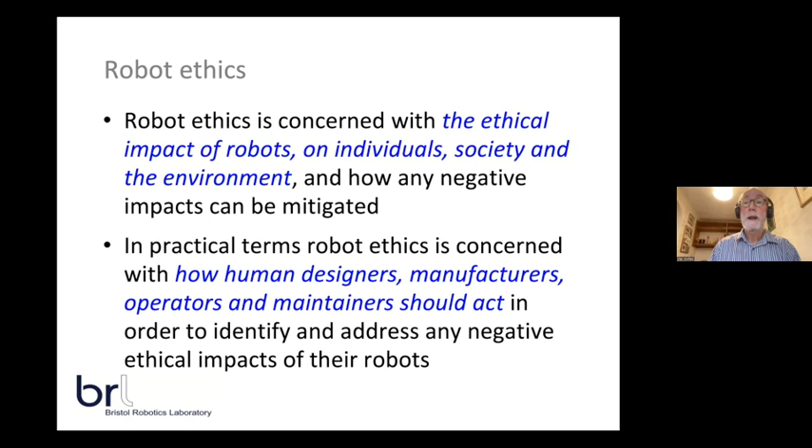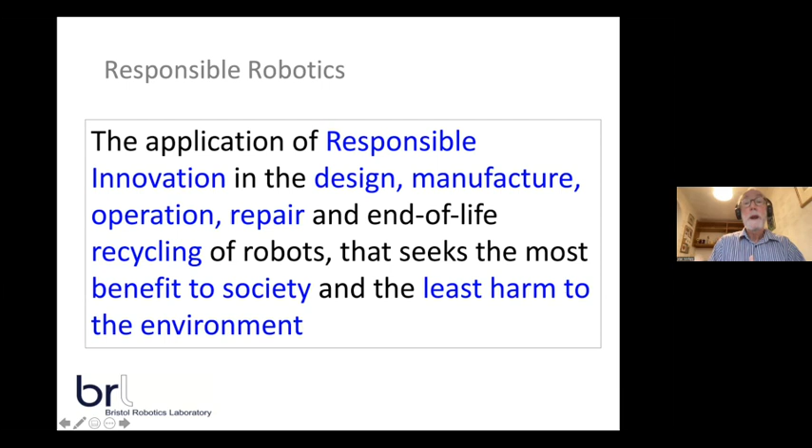Now, responsible innovation is an existing set of ideas, and I'm sure you're all familiar with responsible innovation in your research. It's something that is not an option. Anyone nationally and internationally who receives research funding will have to sign up to doing responsible innovation. So I'm sure you're already familiar with frameworks for responsible innovation.

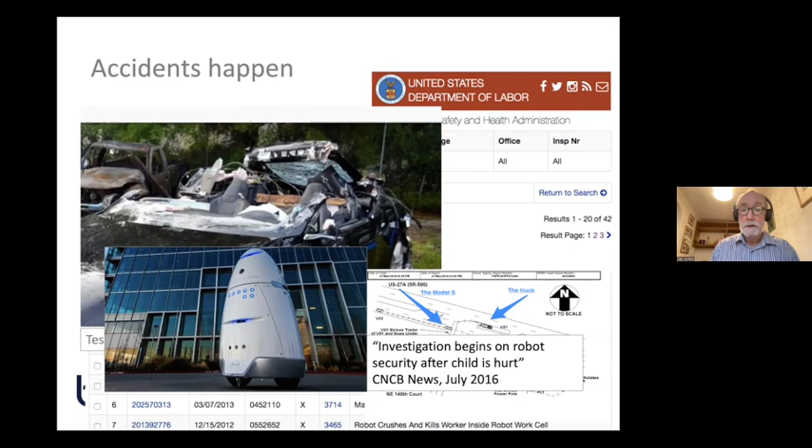So how can robots cause harm? Well, obviously the traditional first category is physical harm, but we need to add a set of ethical harms to physical harm. And those harms can broadly be characterized as psychological harms, which is a very long list of actual hazards: robot deception, over-dependency, over-trusting. Arguably, over-trusting is precisely the thing that the driver of that Tesla was doing, over-trusting the robot, the AI.

Of course, there are societal harms that we're familiar with: loss of privacy, loss of jobs, and such like. And of course, importantly, environmental harms, high energy costs, unrepairable or unrecyclable technology.

And in fact, there is a really nice crowdsourced database, which if you haven't come across, I do recommend. It's called the AI Incidents Database. And it importantly includes not just accidents, but also incidents. In other words, near-miss accidents. And of course, near misses are just as important in terms of safety and ethical safety as actual accidents, because we can learn a lot from near misses.

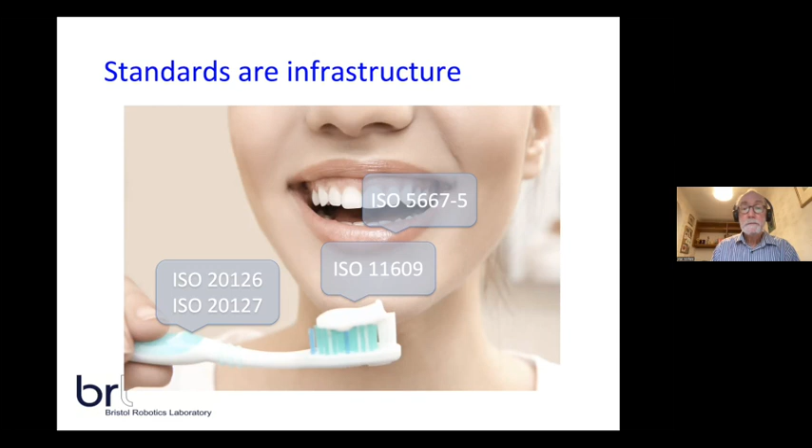And in particular, I'll start with the IEEE Standards Association, who in 2016 launched its global initiative on the ethics of autonomous and intelligent systems. And in particular, they're looking to intelligent and autonomous systems advancing for the benefit of humanity. So this is a really ethically rooted initiative.

And since the initiative was launched, we published this crowdsourced document called Ethically Aligned Design, which I recommend you download and have a look at. It's essentially a set of ethical issues and recommendations, quite a lot of them, in fact. I think around 150 ethical issues. So it really is a very broad and comprehensive approach to what we call ethically aligned design.

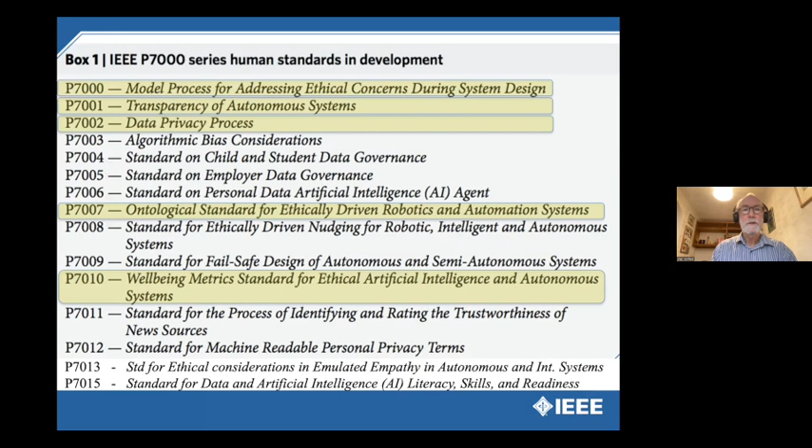And I just want to focus a little bit on the standard that I led, which is IEEE 7001-2021, which is a standard on transparency of autonomous systems. We believe it's the world's first technical standard on transparency. And again, I really want to pay tribute to the working group which I led to really bring this to publication; 5 years of hard labor was quite something.

So why is transparency important? Well, as I've already illustrated at the beginning of the talk, autonomous systems, robots can and do go wrong. And when they do, it's very important that we find out why. And without transparency, finding out why, and therefore making sure it can't happen again, is extremely difficult.

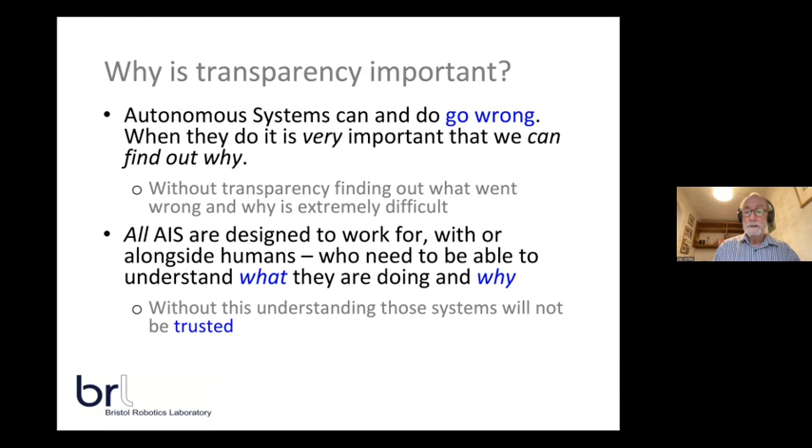And of course, all autonomous systems, all robots are designed to work with, for, or alongside humans. And of course, we need to be able to understand what they are doing and why. And without that understanding, we really will not have confidence in those robots. So transparency, I think, is essential for these things. Now, transparency is not one thing.

And in fact, in 7001, we actually organized the standard into 5 sections, where each section is targeted at a different stakeholder, because each of these stakeholders needs a different set of measures for transparency. Transparency is not the same for safety certification engineers, or for accident investigators, or for lawyers or expert witnesses, or indeed for users and wider society. So each one of these stakeholder groups has a different set of measurable, testable levels of transparency.

And I'm not going to go into these in very much detail, but I will just mention accident investigators. Well, what information does an accident investigator need to find out why an accident happened? Well, obviously details of the events leading up to the accident, and of course details of the internal decision-making processes in the robot's AI, the autonomous system's decision-making processes.

And of course, we have a very good model of best practice, which is the processes of air accident investigation. And in particular, part of that good practice is the flight data recorder, which is fitted as standard. It would be illegal to fly an aircraft, certainly commercially, without a flight data recorder. So we can make use of that, if you like, copy that best practice.

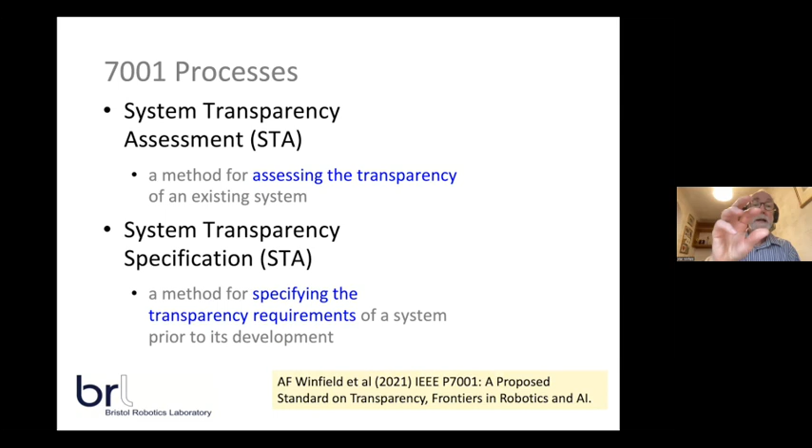And in this paper published in 2021, you can read about the background to the standard, the thinking behind the standard, including illustrations of these 2 processes.

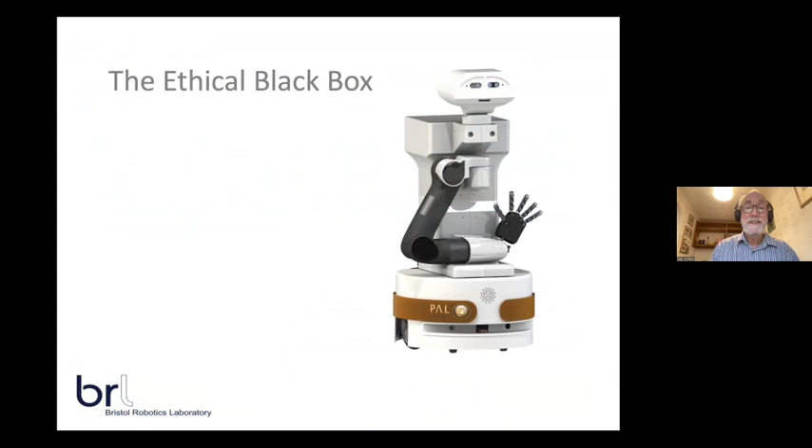Now I'm going to turn to the next thing in our toolkit, which is accident investigation. In fact, I have a current project led from the University of Oxford on exactly that, on robot accident investigation. And in fact, we are developing what we call an ethical black box. We first made the case back in 2017 that all robots, and especially social robots, and of course that includes soft robots, must be fitted as standard with the equivalent of an aircraft flight data recorder. And we call that an ethical black box, simply because it would be irresponsible not to have one.

So we're currently developing this as part of the project, and Jan very kindly referred to my blog, and you'll find blog posts about the development of the ethical black box.

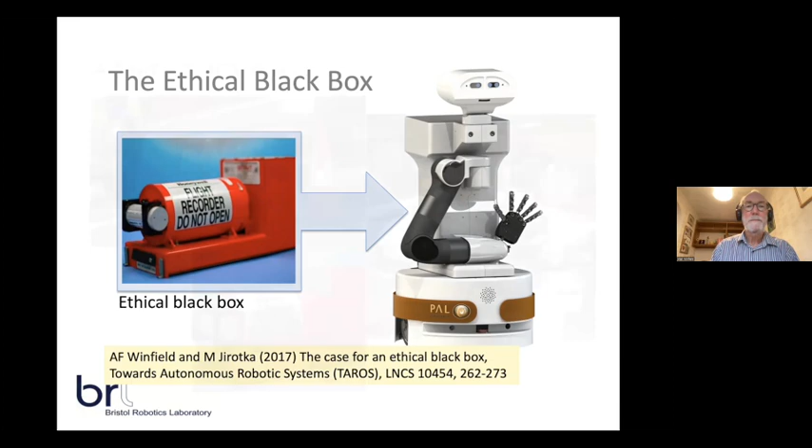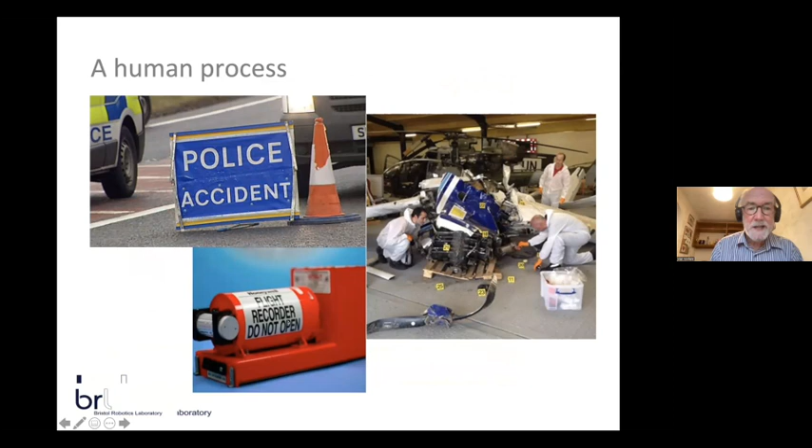But of course, accident investigation is a human process. You need the data, of course, but you also need forensic evidence, you need witness testimony, and so on. And so a unique aspect of this particular project is, and I believe we're the first in the world to do this, we're staging a number of mock accident scenarios. And those 3 scenarios are assisted living robots, educational toy robots, and actually driverless cars.

It says driverless cars here, but we're now thinking we're going to switch that to smart prosthetic devices. And the important thing here is that we have human volunteers as both subject of the accident. Of course, nobody's harmed. These are play acted. Witnesses to the accident, and the witnesses have no briefing beforehand, so they don't actually know what's happening. And of course, members of the accident investigation team, who also do not know what has happened.

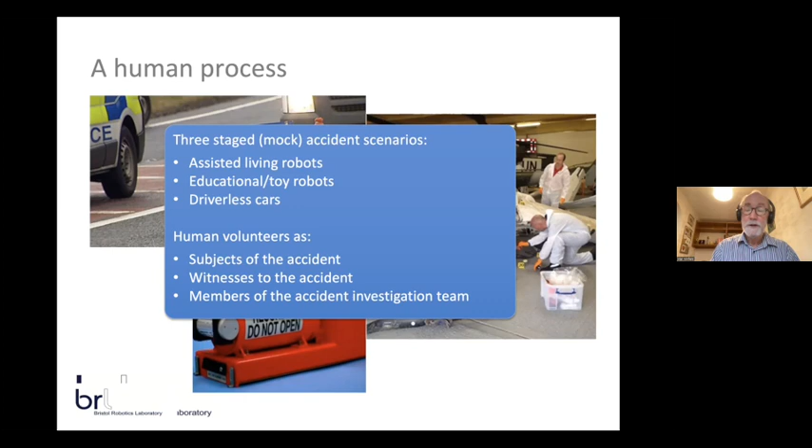So we think that accident investigation is an absolutely essential feature of the toolkit of robotics, of responsible robotics. Now, I'm going to turn to another standard, in fact the first standard that I was involved in, BS 8611, because this, I think, has particular relevance to soft robotics. So what is BS 8611? Well, it's a method for doing ethical risk assessment.

Now, what ethical risk assessment does is essentially the same as old-fashioned risk assessment. In fact, I'm an old-fashioned safety critical systems engineer, so I'm very familiar with risk assessment. It's essentially what safety engineers do, but by extending the envelope to cover ethical risks. In other words, the kind of harms that I outlined earlier, psychological, societal, and environmental. So ethical risk assessment is extending the envelope.

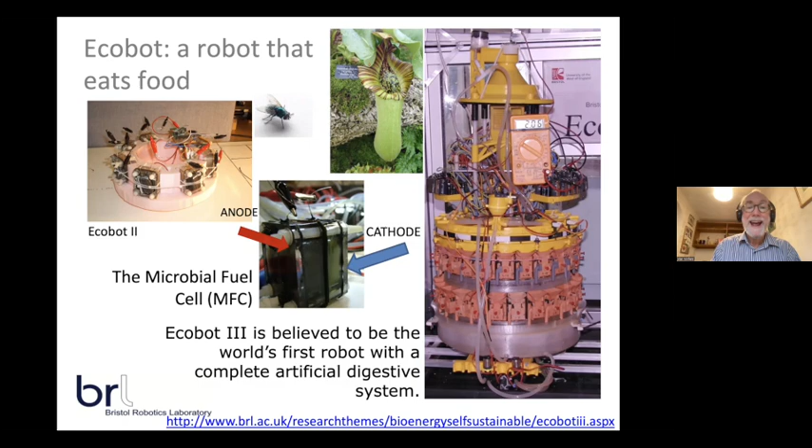So really, I just want to finish by telling you that there is a new British standard in development. It's called A Guide to the Sustainable Design and Application of Robotic Systems. I believe that this new standard, when it's published—we're only about 6 months into writing it—will be really important to robotics in general, but especially salient to soft robotics. Essentially, the standard sets out requirements for robots to be made from sustainable materials, to be energy efficient, to be repairable, and to be recyclable, among other things. Those are just the 4 key headlines.

And again, you could read a little bit more about this on my blog if you're interested.

So that brings me to the end of this keynote. But in conclusion, I really want to say that I believe soft robotics has huge potential to extend the envelope of responsible robotics to encompass truly sustainable robots—sustainability that is very difficult to achieve with traditional, hard robots. So I think there is an extraordinary opportunity for soft robotics. And that's really why I'm suggesting a move towards responsible soft robotics, which goes beyond the responsible robotics that we should indeed be doing anyway, with all robotics, not just soft robotics. So thank you very much indeed.